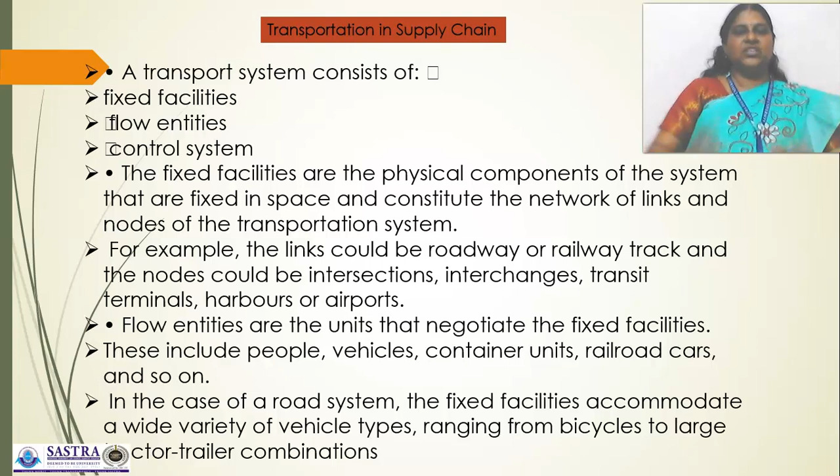The control system consists of vehicular control and flow control. Vehicular control refers to the technological way in which the individual vehicles are guided on fixed facilities. Such controls can be manual or automated. The characteristics of the vehicular control system are considered by proper geometric design of fixed facilities, because it should be properly planned and designed.

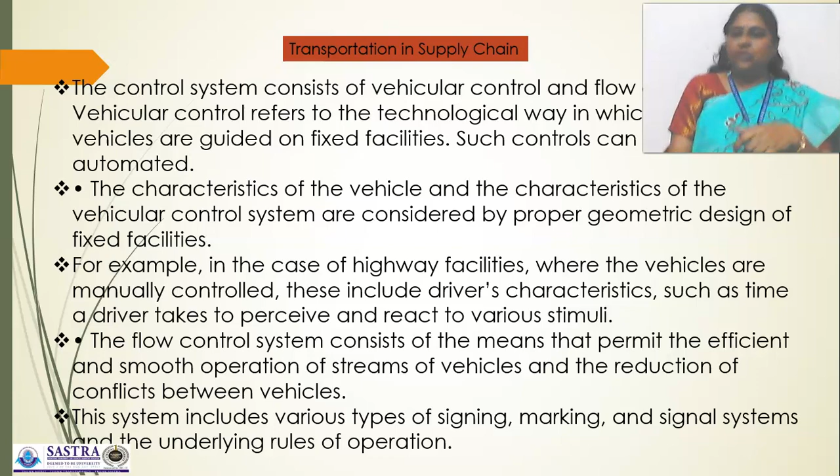For example, in the case of highway facilities, the vehicles are manually controlled, and this includes driver characteristics such as the time the driver takes to perceive and react to various stimuli. The flow control system consists of the means that permit the efficient and smooth operation of streams of vehicles and the reduction of conflict between vehicles. The system includes various types of signing, markings and signal systems, and also underlying rules of operation, how they have to operate.

Transportation in the supply chain also considers civil engineering matters. Civil engineering is the branch of engineering involved in designing the fixed facilities, and these designs include the characteristics of the soils and the foundation, the structural engineering designs, the design of drainage systems within the city limits, and the geometric designs, which are concerned with the physical proportioning of the elements of fixed facilities.

The success of any supply chain is closely linked to the appropriate use of transportation. For example, Walmart has effectively used a responsive transportation system to lower its overall cost.

Walmart uses cross-docking, that is a process in which the product is exchanged between trucks, so that each truck going to a retail store has products from different suppliers. So that route alone, along with the truck, will be monitored.

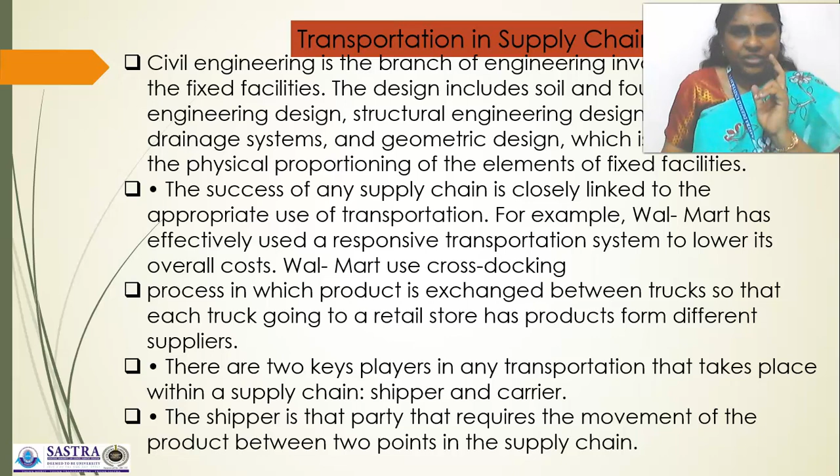There are two key players in any transportation that takes place within a supply chain. One is the shipper, or the person who is sending the product. Another one is the carrier, the person who is carrying or transmitting the material. The shipper is that party that requires the movement of the product between two points of the supply chain, and the carrier is the party that moves or transports the product.

For example, when ABC uses UPS to ship its computers from the factory to the consumer, ABC is the shipper and UPS is the carrier. So the management of the supply chain requires a coordinated approach to manage all activities to provide the greatest value to the consumers. And the basic service for increasing national income is transportation.

As national income rises, infrastructure adapts to support changing patterns of demand with the shares of power, transport and communication. So transport is one of the most important services within any country, and it is a vital sector of growth and development, which is creating new economic activity. Since economic development of a country requires adequate and effective transport services, the degree to which transport creates a new activity is the necessary condition

within the economy. So transport is one of the essential elements of an integrated plan for area development and an indicator of developed countries. People say that even in the 1960s, China became the model for infrastructure development. They constructed overland bridges, underground systems of railways and roadways, channel services, and everything. So they have now developed a lot in the industrial sector.

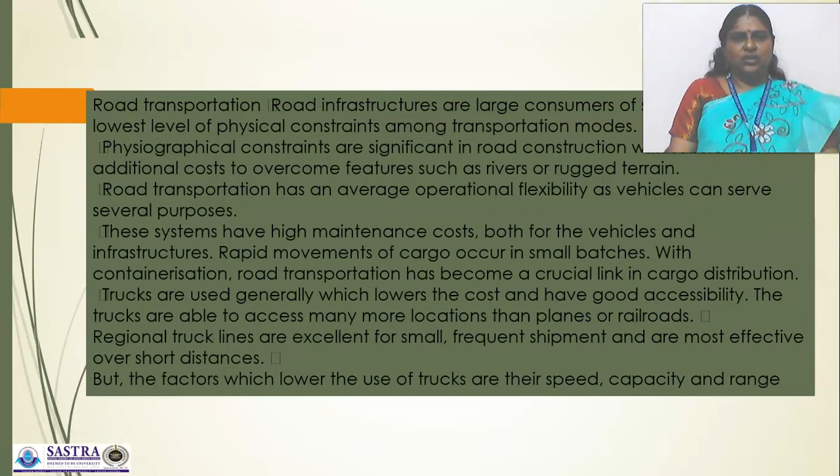Road transportation is the first transportation mode, which is majorly used in India. Road infrastructures are large consumers of space with the lowest level of physical constraints among transportation modes. Physiographical constraints in road construction come with substantial additional cost to overcome features such as rivers and rugged terrain. Road transport has average operational flexibility as vehicles can serve several purposes. These systems have high maintenance costs, both for the vehicles and for the infrastructure.

Rapid movements of cargo occur in small batches, and with containerization, road transport has become a crucial link in cargo distribution. Trucks are generally used for these purposes, which lowers the cost and gives good accessibility. Trucks are able to access many more locations than aeroplanes and railroads. Regional truck lines are excellent for small and frequent shipments and are most effective over short distances, for petroleum products, agricultural produce, and other goods.

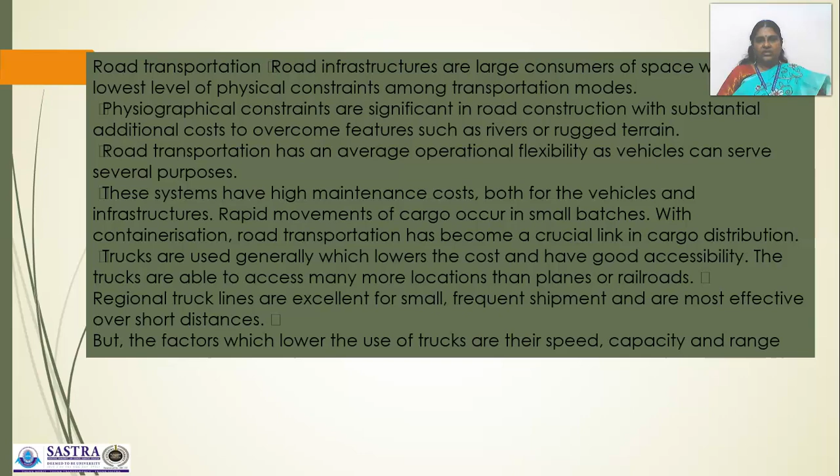But the factors which lower the use of trucks are their speed, capacity and range. Coming to rail transportation, railways have an average level of physical constraints linked to the types of locomotives. Heavy industries are traditionally linked with rail transport systems, especially cement and iron and steel industries. Containerization has improved the flexibility of rail transportation by linking it with road and maritime modes. Rail is by far the land transportation mode offering the highest cargo capacity, that is, the goods train.

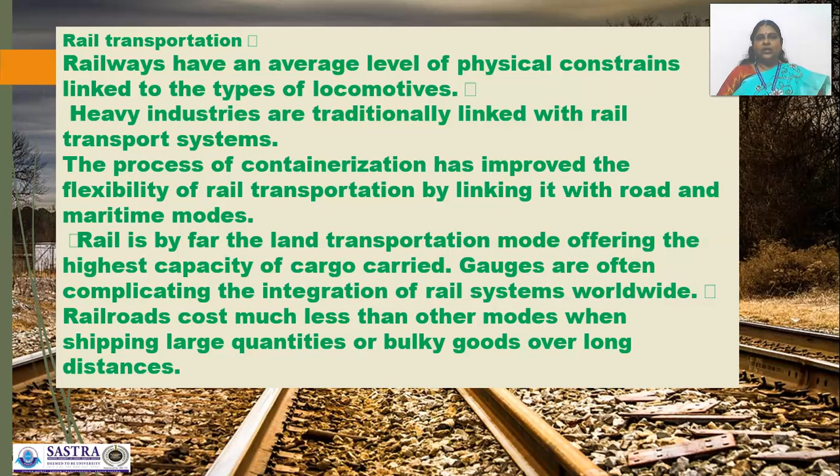Gauges often complicate the integration of rail systems worldwide. Railroads cost much less than other modes when shipping large quantities or bulky goods over long distances. Coming to pipelines, pipeline routes are practically unlimited as they can be laid on land or underwater, like petroleum pipelines or telecommunication wiring. They are used for transport of homogeneous materials.

Costs are lower than other transport modes. Pipeline construction costs vary according to the diameter and the depth of the ocean, and they increase proportionally with distance and with the viscosity of fluids. Pipeline terminals are very important since they correspond to refineries and harbors. Pipelines are ideal for materials such as water, oil and gas, that is, petroleum.

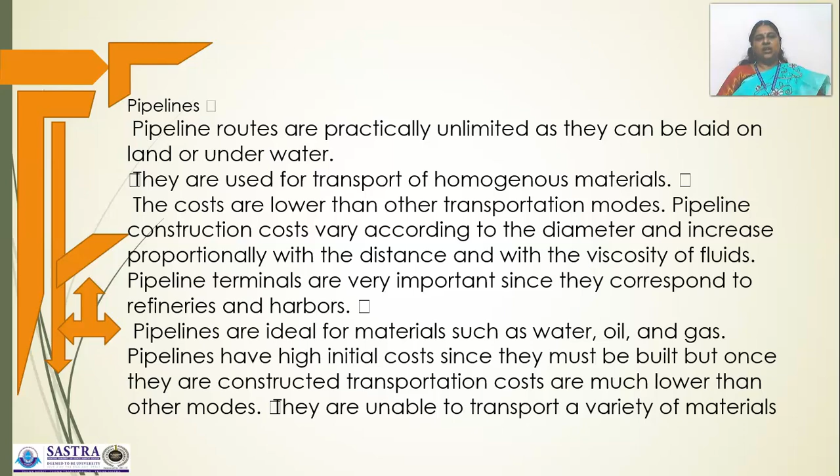Pipelines have high initial cost since they must be built once, and their transportation cost is much lower than the other modes. They are unable to transport a variety of materials, and they can only carry the material they were built for.

Next is maritime transportation. Ships are one of the oldest methods of transporting goods, and they are virtually the only way to transport large volumes of goods overseas. From ancient days onwards, we have used ships for trading, international trade.

Although this method is slower than shipping by air, a ship can carry much more cargo than aeroplanes. So costs are reduced significantly by choosing ships over air transport because of the physical properties of water, such as buoyancy and limited friction. Maritime transportation is the most effective mode to move large quantities of cargo over long distances.

Main maritime routes are composed of oceans, coasts, seas, lakes, backwaters, rivers, and channels. Canals are also available, sometimes as smaller backwaters. However, due to the location of economic activities, maritime circulation takes place on specific parts of the maritime space. The construction of canals and dredging are attempts to facilitate maritime circulation by reducing discontinuity.

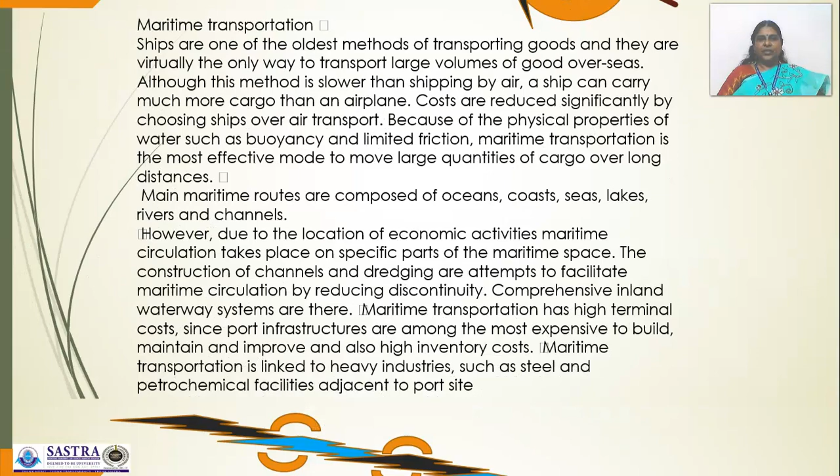Then air transportation. Air is considered the premium mode of transportation because of the speed of delivery and the low impact on the cargo. Items are less likely to be broken than those shipped by rail or by truck. The damages are very less, but it is very costly. Aeroplanes are also able to cover much larger distances in a short time. So time is the main criterion here, and the spoilage of items. Savings from speed of delivery are greater than the extra cost.

Air transport constraints can be the site, the climatic conditions, the fog, and the aerial currents. For instance, a commercial plane needs about 3,300 meters of runway for landing and takeoff. Air activities are linked to sectors like finance and tourism, which lean on the long distance mobility of people, whereas the mode has been accommodating growing quantities of high value goods and is playing a growing role in global supply chain management.

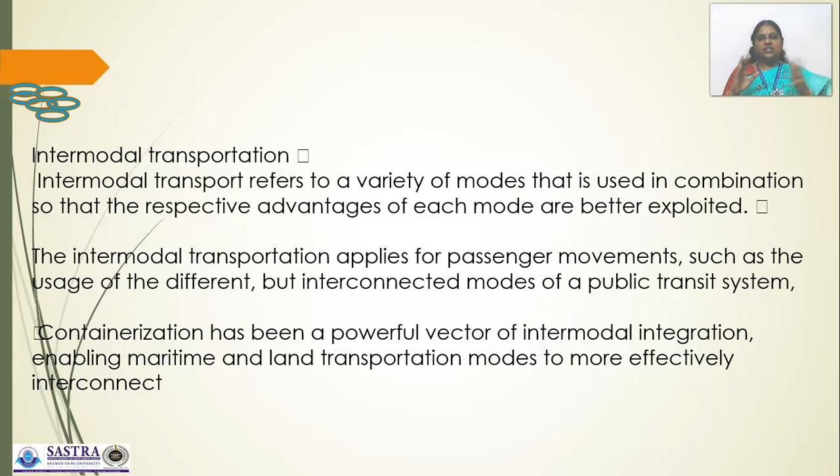Next is intermodal transportation. Intermodal transportation refers to a variety of modes used in combination so that the respective advantages of each mode are better exploited by the manufacturers. Intermodal transportation applies to passenger movement, such as the usage of different but interconnected modes of a public transit system. Containerization has been a powerful vector of intermodal integration, enabling maritime and land transportation modes to interconnect more effectively.

When talking about other methods of transportation, telecommunication also plays a vital role. Telecommunications are structured networks with practically unlimited capacity, and they have very low constraints, which include the physiographic and oceanic masses that may impair the setting of cables. They provide for the instantaneous movement of information, and wave transmissions, because of their limited coverage, often require substations, such as for cellular phones and networks. Satellites use a geostationary orbit, which is getting crowded nowadays. So high network cost and low distribution cost characterize many telecommunication networks.

So on the whole, when talking about transportation facilities, the major role is played by the roadways. Still in India, the airlines and rail transportation are not that much developed. Neither are the waterways fully used, and only a small amount of such transportation is used. Even though we have a variety of transportation modes and systems, the infrastructure is very little for certain areas. It is a very big drawback where we cannot get an airport or railway stations, and in certain places we have to carry goods by bullock carts even today, in parts of underdeveloped or developing nations.